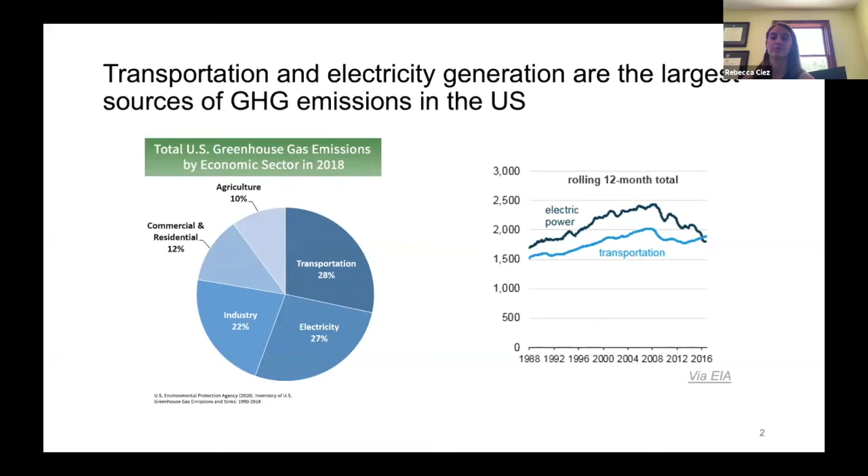I'm really happy to be here to present some of my recent research looking at batteries for decarbonizing and meeting climate challenges. When you think about energy and emissions, transportation and electricity generation are the largest sources of greenhouse gas emissions in the United States, and energy storage has potential roles to play in both. Transportation has recently overtaken electric power as the largest source of emissions in the US, and transitioning to zero emissions vehicles, whether battery electric vehicles or potentially fuel cells, is one way to mitigate that. But energy storage also has a role to play in electric power generation moving forward.

In the EV market, there's been a lot of development. There are many more vehicle models available today in the US than back in 2011, when there were fewer than 5. Today there are almost 50 different vehicles you can choose from. Globally, the market share of EVs is trending upwards, right now about 2.5%. There might be some shocks because of the coronavirus pandemic, but the long-term trend is still looking up. But what about the power space?

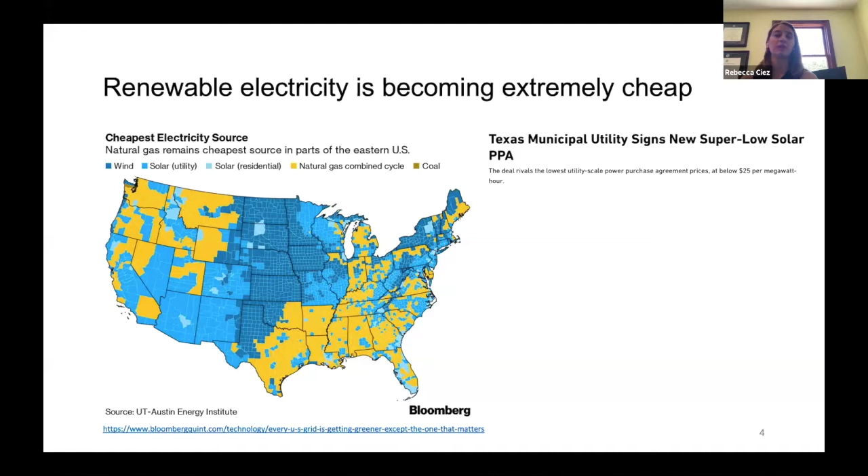Coal is being phased out more and more in the United States, and it's potentially being replaced by wind and solar, which is being bid at really low costs. Today, new power projects in Texas, Alberta, and Colorado are bidding to deliver renewable electricity at 2 to 3 cents per kilowatt hour.

And so these are pretty different places. It's not just that there's a lot of solar in California anymore. These are pretty diverse markets that are being able to deliver very inexpensive renewable electricity.

But obviously renewable electricity is not as consistent as a power plant that you can just turn on and off. And so we want to be able to store the electricity that's produced when wind and solar resources are available to meet demand at other times of the day when people want to be able to have electricity.

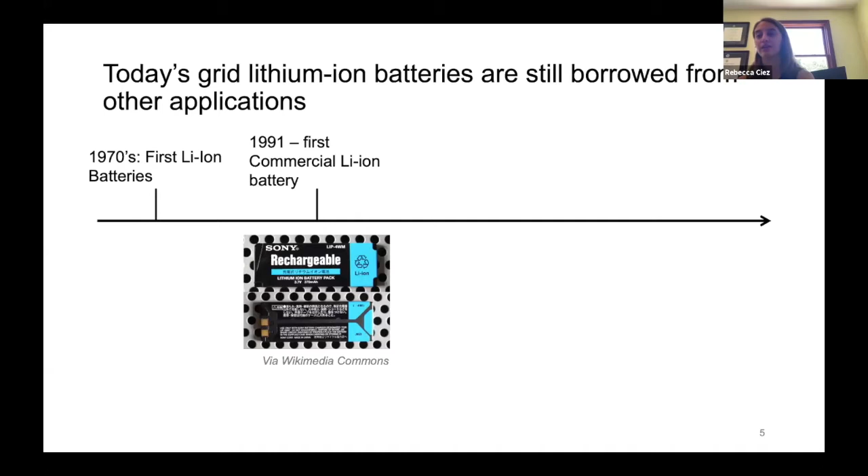And so when you think about the role that batteries can play in the grid, what we're using today is still largely borrowed from other applications. Lithium-ion battery research really started in the 1970s. They were commercialized for consumer electronics in 1991 by Sony. And so basically every new application has been largely borrowing from what's existed.

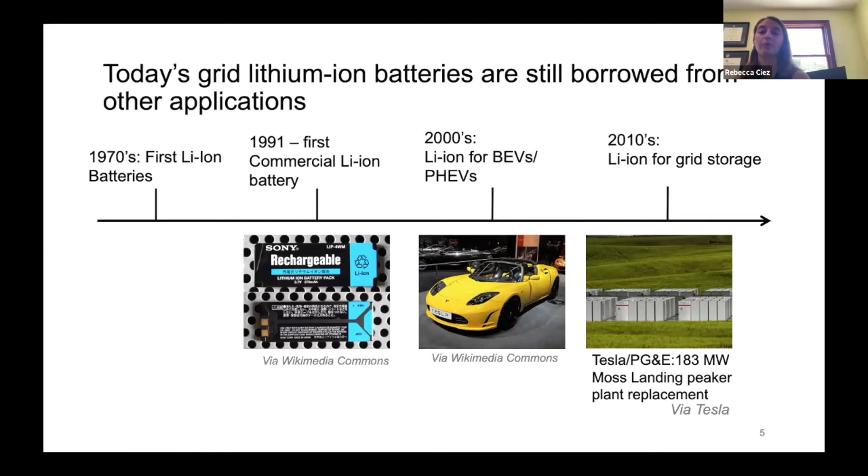So in the 2000s, they were taking the lithium-ion batteries from laptops and putting them into electric vehicles. And what we've seen recently is that you're essentially doing the same thing, taking the lithium-ion batteries from electric vehicles and putting them onto the grid. And so this is a project that's under construction in California, where they're replacing a natural gas power plant with Tesla batteries.

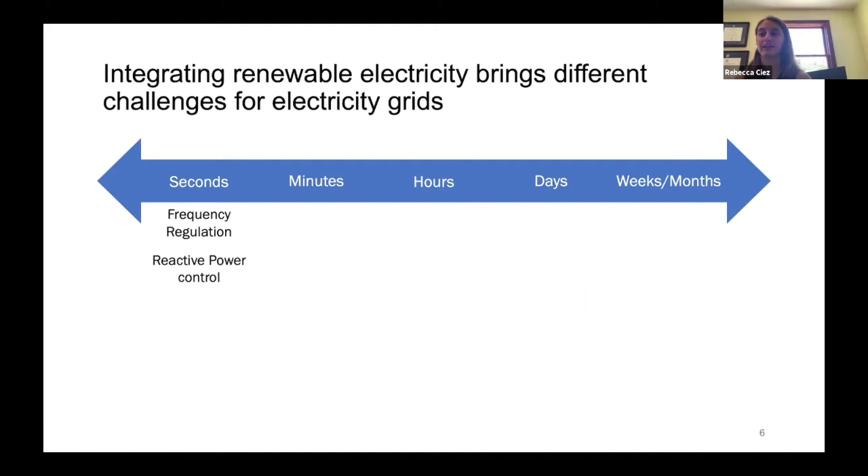And so when you think about what you want to be able to do for real renewable integration in the grid, you're thinking of different challenges on different timescales. On the order of seconds, you're thinking about how do you provide resources for frequency regulation or reactive power control, be able to do black start or synchronous reserves, and then finally starting to get into these peak shaving or peaker replacement.

What all of these applications have in common is that they're relatively high power. So you're not really providing energy for a long duration of time, but you need to be able to deliver electricity quickly. And so the batteries that we're pulling today from electric vehicles are already able to be competitive in this space, right? You need your car to be able to accelerate quickly, so there's already sufficient power density in those batteries to meet these demands. And the markets for these services have high enough prices that you can recover your investment on what is still a pretty high capital cost on lithium-ion batteries today.

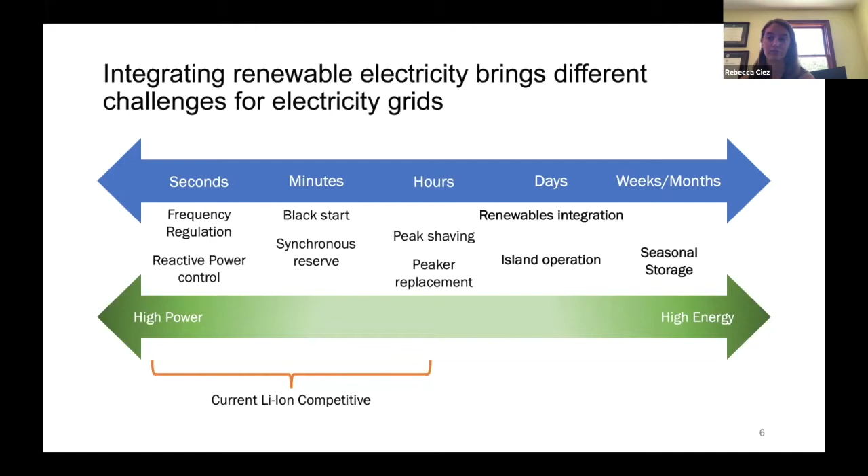But longer term, what we're really looking at is these renewable integrations. So how are you shifting hours of demand from when you have overgeneration in the afternoon to the evenings and the early mornings when people actually want to use electricity? Could you potentially do island operation of microgrids, and then potentially even look at some seasonal storage applications where you're really looking for high energy density batteries?

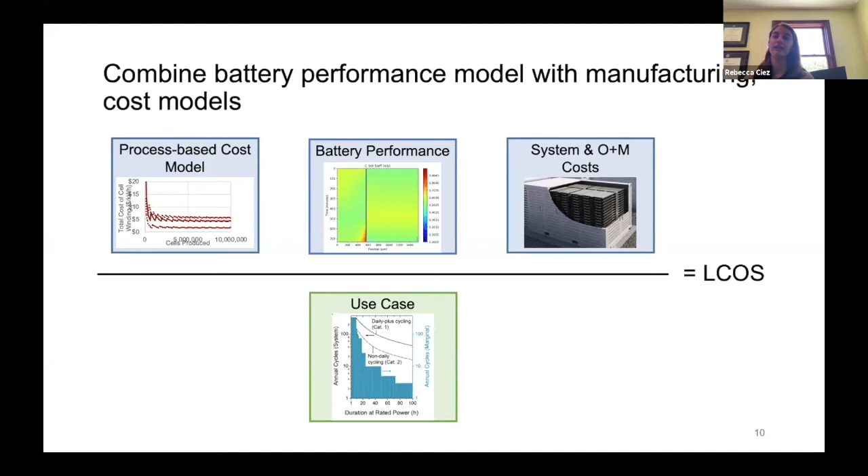And so to model each of these different components, we have different submodels that we combine. So the first is a process-based cost model to look at battery manufacturing costs depending on your design decisions. We do a simple model of battery performance to see how the batteries behave over these charge and discharge cycles. And we make some assumptions about the system hardware and integration costs. And then we used a use case. And so this is drawn from an ARPA-E call for proposals looking specifically at long duration storage. And I'll talk a bit more about what goes into that later.

And so I know that this is a diverse audience, so I'm going to talk a little bit about lithium-ion batteries. And so hopefully I will give you enough of an overview that you know what I'm talking about when I talk about the system components. So all lithium-ion batteries are named because lithium is the charge carrier, but the materials inside the battery can vary a little bit. So each battery has two electrodes, a positive and a negative electrode.

So the negative electrode or the anode is typically made of graphitic carbon. And that's common across almost all commercial lithium-ion batteries today. So things in your phone, your car, an EV, anything else, you're looking at a graphitic carbon anode.

Then you've got the positive terminal or cathode, which is made up of a bunch of different types of materials. And then finally, there's an electrolyte, which is typically an organic liquid that's used to shuttle the lithium ions between the two. And so the energy density of the battery really depends on the voltage difference between the two electrodes. The specific capacity, most of the differential is driven by what's happening at the cathode.

So cathode materials can vary widely. Some of them have really expensive transition metals. So there's a lot of discussion about how can you remove cobalt from certain formulations and increase the use of nickel or manganese that are less expensive. And so there's a lot of innovation to improve the specific capacity of cathode materials, and then eventually to remove the graphitic carbon and just have lithium metal anodes.

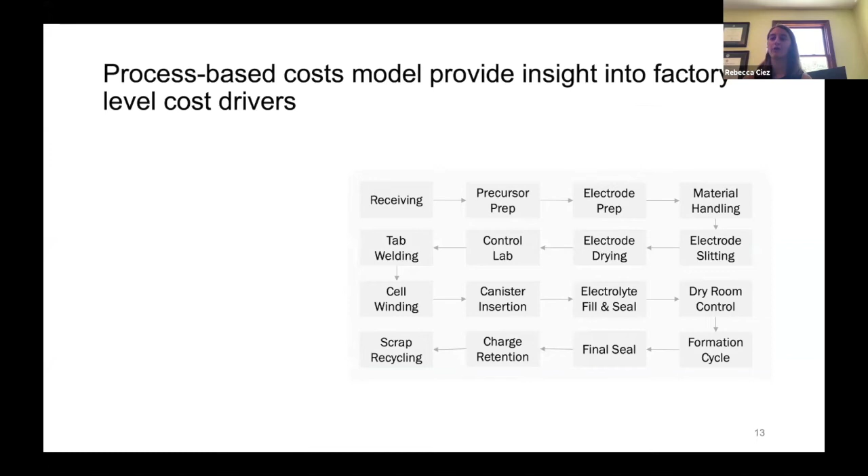And so based on those two different geometries, we built a process-based cost model to factor in what's happening at the factory level. And so to do that, you take every step in the battery manufacturing process, and you kind of figure out how many pieces of equipment you need, what kind of labor requirements there are, and you can build a model depending on how many batteries you're trying to produce.

And so, as you can imagine, you've got your first machine. As you increase the production volume, you see the cost per unit decrease up until a point, right? So you're using it to produce more parts, and so the higher utilization means each part costs less individually, but eventually you have to buy a second machine or you have to hire a second person. And so you see these spikes in the production cost that vary as you increase the production volume. But eventually you get to a point where it doesn't really matter that you've had to buy a second machine. You're still dividing by such a large number that you've reached an economy of scale. And so this is what I would consider economies of scale at a factory level.

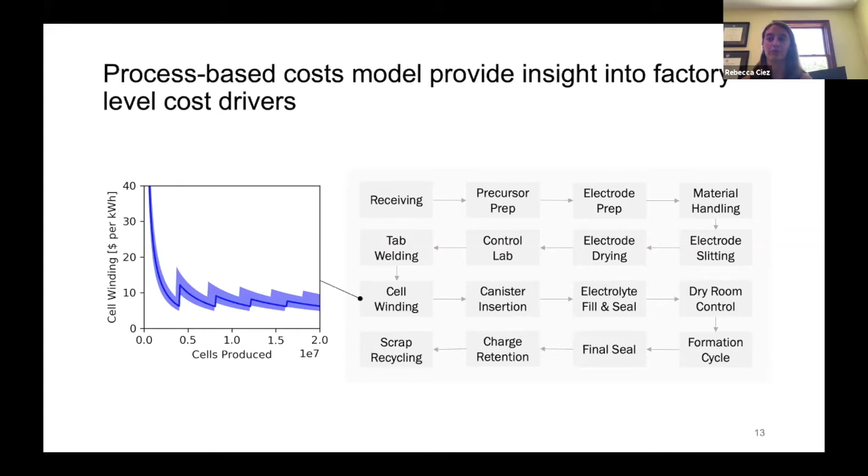And so this helps drive decision-making if you're trying to make choices about what kind of batteries to manufacture, and provides insights into where there's opportunity to further improve costs. And so when you build all of these up, you can get one overall manufacturing cost per kilowatt hour, depending on the production volume of batteries.

And so what we see is pretty consistent with what we've seen in previous studies looking at manufacturing EV batteries, that you're reaching these economies of scale at less than a gigawatt hour of annual production per year. Just for reference, I think Tesla's Gigafactory is currently producing about 30 gigawatt hours per year. They're looking to expand it up to 50.

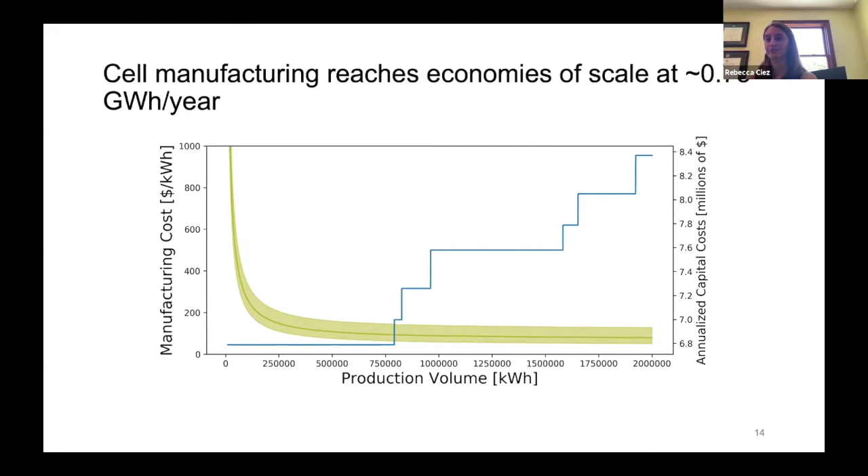There are dozens, if not hundreds, of these scale manufacturing facilities in China. Europe's investing heavily. So these are definitely typical scales of battery manufacturing capacity today. And so when we run this for each of the different types of cells that we were considering, we see that the pouch cell costs decrease as you increase the cathode thickness.

And so basically what you're seeing is you're spending less per kilowatt hour on other stuff as the active volume increases. And so we see that there's pretty steep drop-offs, especially if you go from like 100 up to 300 microns in terms of thickness. And then eventually you kind of reach this asymptotic value. And then the bobbin cell that we considered is somewhere in between.

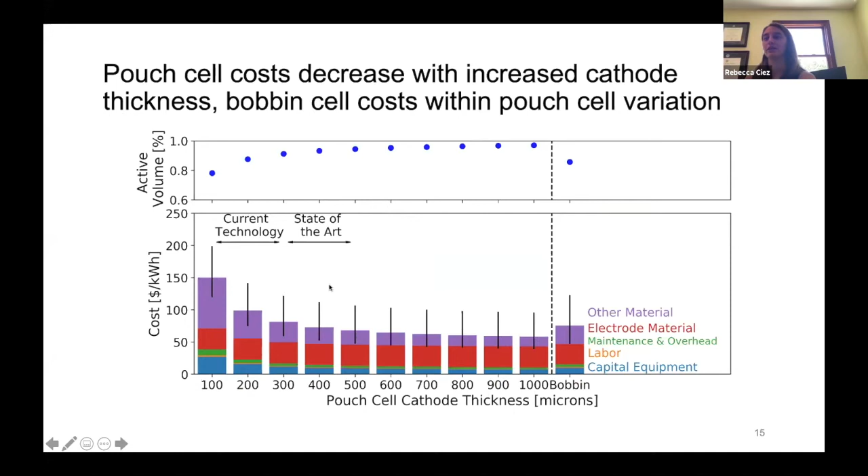And so once we had these cells constructed, we wanted to simulate the battery performance. And so I'm not going to get into too much detail. We used an existing model out of UC Berkeley that lets you input specific parameters about the cathode material, and you get a first order approximation of the charging and discharging efficiencies, right?

So basically the difference between the equilibrium voltage and the actual model voltage is what's driving a lot of this efficiency loss. And it varies depending on the type of battery you're producing. But overall, charging and discharging efficiencies are relatively high.

And so then what was really important was to factor in a relatively realistic storage profile. And so as I mentioned, we were using some assumptions based on the ARPA-E long duration storage call for applications. And so basically what they're assuming is that you're providing about 8 hours of storage on a near daily basis, right? So if you were to think back to the chart with electricity prices in California, you're arbitraging from mid-afternoon when there's a lot of curtailment to provide enough storage for both morning and evening peaks.

And then you've got these other longer duration storage events that happen with less and less frequency, right? So you can imagine that there might be a lot of days per year where there's cloud cover, and so you want to be able to provide 2 days worth of storage for those 2 peaks. And then as the duration of storage increases up to about 4 days, they're assuming that there are about 3 of those events per year.

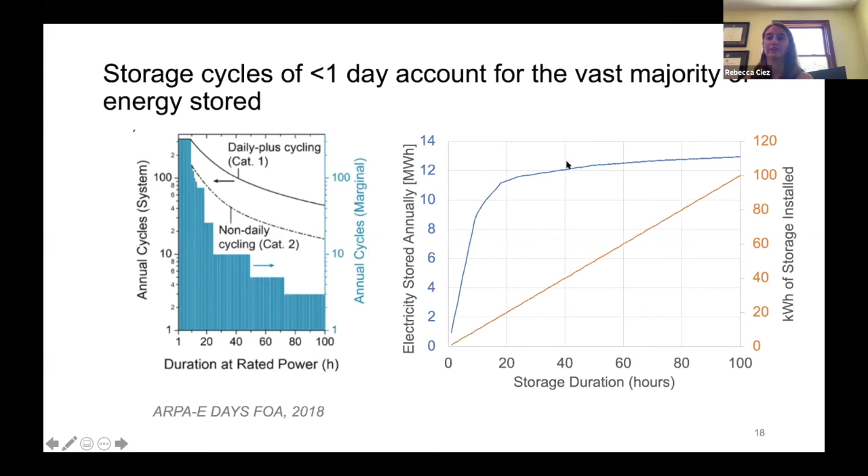And so that bears out: if you install additional storage capacity to meet that longer and longer duration, you see this linear increase in the kilowatt hours you have to install. But the annual electricity you actually deliver from that storage capacity drops off pretty quickly. So most of this is these very short cycles with relatively small additions from longer duration storage.

And so when we account for that, again, with the cost of manufacturing, we see that you can achieve relatively low levelized cost of storage, and it's lowest when you're cycling most frequently, which makes sense, right? So if you're utilizing the capital you've installed more frequently, you can really drive down the cost of storage.

And so we see that these costs of 5 cents or lower are generally pretty comparable for all of the different types of battery, the different configurations we looked at. So these pouch cells with different electrode thicknesses, and then the bobbin cell.

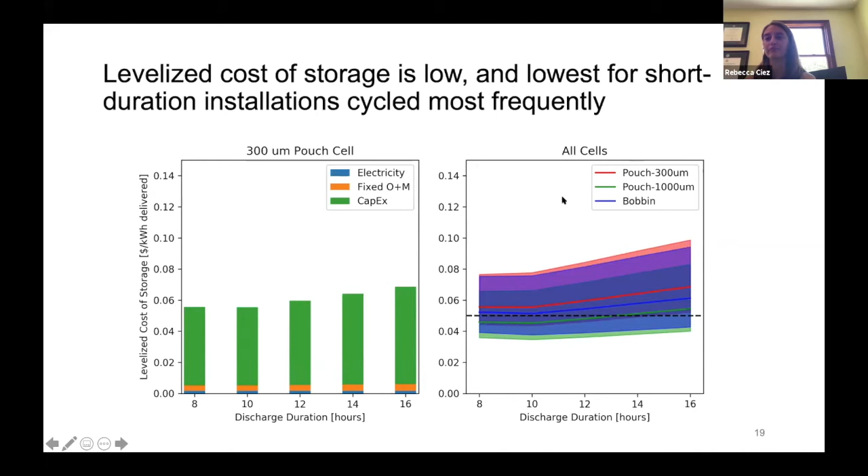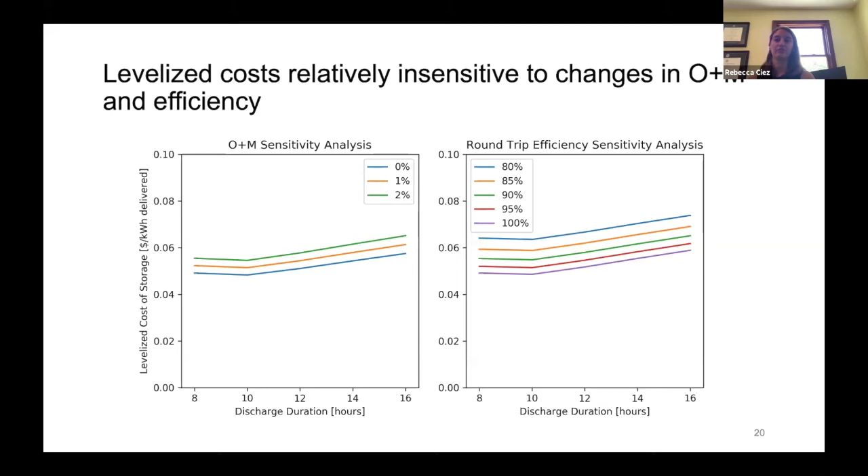And so we also ran some different sensitivity analysis, and we see that the levelized cost is relatively unchanged by changes to the operation and maintenance cost as a percentage of the installed capital cost. And then round trip efficiency also has a relatively minor impact on the cost of storage.

And so lithium-ion batteries designed specifically for long duration storage can cost less than today's batteries. Reducing the balance of cell material relative to electrodes can reduce cell costs. There are existing low-cost cathode materials to help reduce the upfront capital costs. That does hurt on the back end.

So some of my other research has looked at battery recycling. And if you want to recycle batteries, a lot of people are looking for high value materials to be present. And if that's not the case, it's less economical to do battery recycling. If you're looking at 4-hour applications, cell charging and discharging efficiency isn't terribly sensitive for these longer load shifting applications. And then you really want to have low O&M costs, which is helpful if you've got a closed form cell.

And so I sort of mentioned seasonal storage, which definitely was not covered as part of this research. And so what are we talking about when we talk about seasonal storage? So basically there are these known patterns of reduced electricity output. If you've got wind, plant capacity factors generally drop off in the summer, so they're called the summer doldrums. And then obviously during the winter, there's just less sun in the northern hemisphere. The opposite is true depending on where you're at geographically. But these are really predictable changes in electricity output.

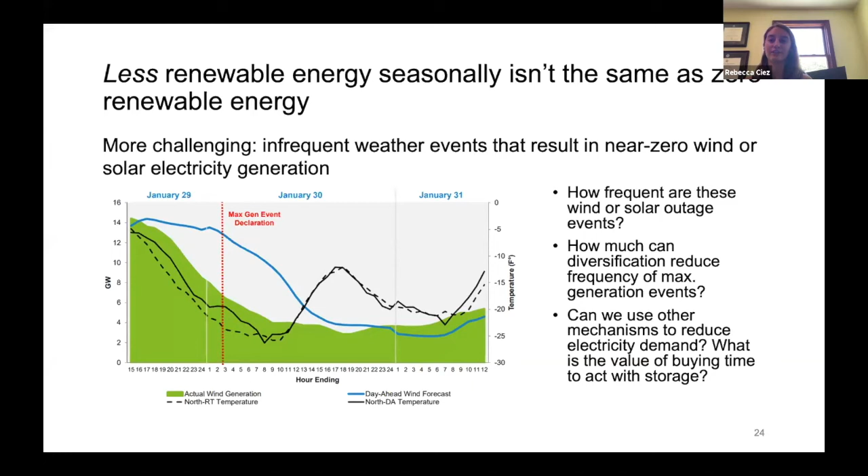And so how frequent are these rare events? And can we diversify the electricity mix enough that we wouldn't have to worry about these events happening from a single source? And then are there other mechanisms to reduce electricity demand? And is there a value of using storage to essentially buy yourself time, right? So if you have a 3-day battery and you're using the 3rd day's worth of storage, you were preceded by using 2 days worth of storage and kind of knowing that things weren't going great. And so are there other potential mechanisms that we could employ for these different infrequent events in a way that we haven't previously?

And so just looking forward for the role for low carbon energy systems, today's grid storage projects have very, very short procurement times, right? So their projects are bid, installed, and then up and running within like 18 months in some cases. So it's an incredibly fast timeline compared to a lot of power plants. We see that lithium-ion batteries can provide lower cost storage, and there's still room for improvement. And so looking at that as a potential new entrant technology, that's really tough to beat these existing markets, especially if you've got these really short project times, right? So it's hard to enter that if it's your first big project.

And then storage systems, or really anything that you would want to use infrequently, would have to be exceptionally cheap. And so if you wanted to do longer duration or truly seasonal storage, we would have to be at a very, very low capital cost, essentially zero. And so finding those solutions will be extremely difficult.

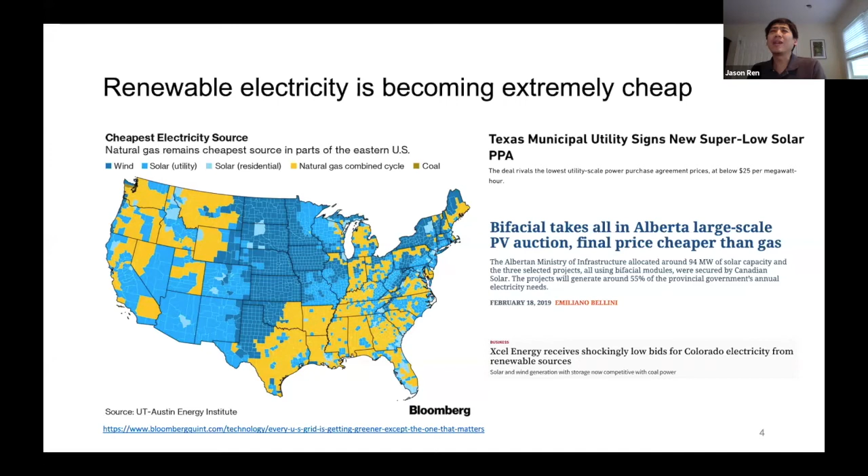The next question is on slide 7. Basically, Joe is asking why the floor of 22,000 megawatts is so high, and the high point is only about 1/3 higher. Is it the duck curve? Basically, how would you see the difference?

So this is the duck curve, right. It's the state of California, so it's a pretty big state. There's a lot of people, so they're using a lot of electricity even at night, and so there's just a lot of variability on a daily basis, even if the baseline is pretty high.

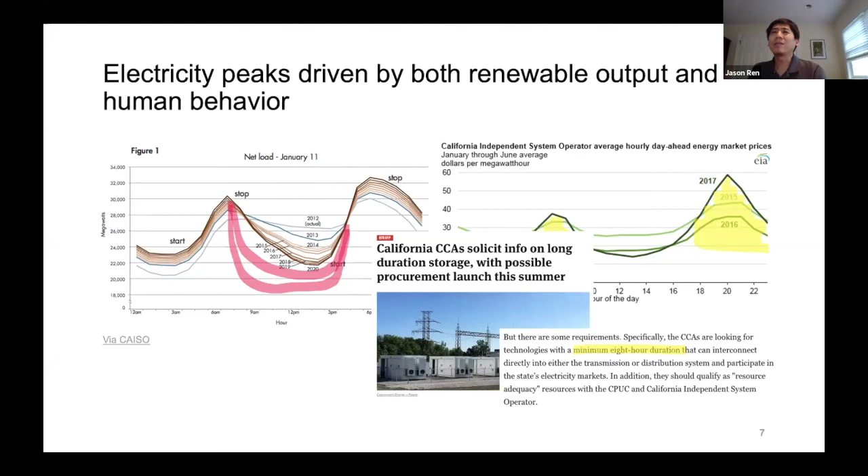So the next question is about slide 17: what are the factors affecting the efficiency curves? If you can explain that a little bit. So basically what's happening at the bobbin cell is you've got a decent amount of overpotential. You have such thick electrodes that there's like a traffic jam for all of the ions to make it all the way through. And when you see that concentration difference, that's what's driving down some of the efficiency.

You don't have the same challenge in a pouch cell with these thinner electrodes, on these really, really long charging and discharging times compared to what you would test in a car battery or a cell phone battery. And so that's why you're seeing these differences in efficiency.

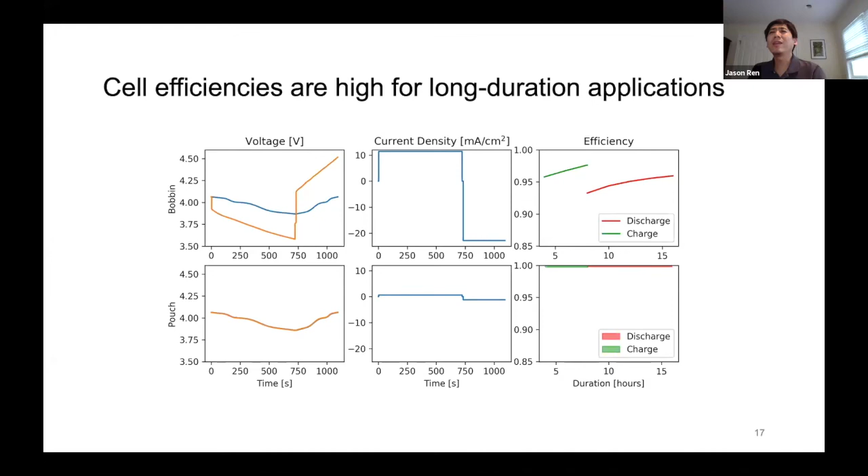Yeah. So I cut off some of these for spatial reasons, so hopefully everybody can see on their screen. But yeah, EIA makes these graphs for different places.

Okay, so next one is about cost. Regarding, say, return on investment, where do you see the revenue generation in terms of implementing the different battery technologies in this case?

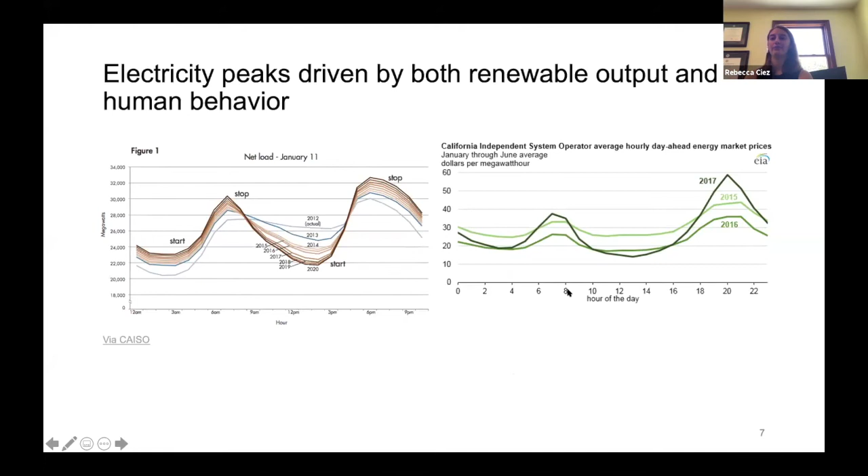Yeah, so really what you'd be looking for is to be able to sell electricity at these higher price times. And so if you're getting electricity at 2 cents per kilowatt hour, or potentially even zero. So what we've seen a lot recently is existing solar PV plants are installing batteries in California to be able to make up for this price differential. So they're getting the electricity at zero because they can't sell it into the market. And then you're making up that difference in these evening and morning periods when prices are closer to 4 or 5 cents per kilowatt hour.

Yeah, for sure. Well, I'm just reading the questions as we go, but the next few questions are actually quite related. If you can comment on some other technologies compared to lithium ion, which you focus on, like sodium ion, or I think I've heard potassium ion, or even hydrogen storage, or even pressure conversion to energy. I mean, all these things. What are your thoughts on this?

Yeah, so there's a lot of interest in different, like potassium or sodium ions. There's challenges with cycling those. Basically, lithium ions are popular and prolific because the lithium ion is the tiniest charge carrier of these different salts. And so there are different challenges associated with those other batteries, and so they haven't been scaled up to the same degree.

Hydrogen's interesting because you potentially produce it at relatively low cost. Basically, you've got big storage tanks of hydrogen. You've got an electrolyzer or a fuel cell that's using it or producing it. And so you've really fully decoupled power and energy costs in those kinds of systems. It's just a matter of whether the market's really demanding electricity produced from those systems, or if you're too far out ahead. And then can you store it in a way that's cheap enough? Can you compress the hydrogen in a way that's cheap enough? And do that at the scale necessary.

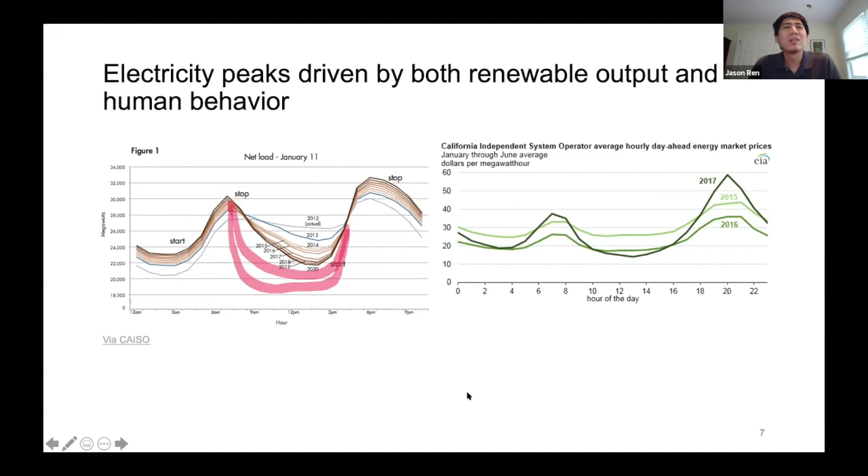Yeah, so I think looking at these longer duration applications is interesting. I do think that there's value to knowing that things in your system are not operating the way that you would want them to. And I think that's a potential area for trying to figure out where the true limit of this long duration storage should be. And so collaborating on trying to figure out where that floor is, and where you can provide value to do other demand response options by knowing that you've used several days' worth of storage. I think identifying that is important.

And then again, just being able to design systems where you could potentially foster these newer technologies to compete with lithium-ion batteries I think would be really important moving forward. So if we need all these different storage assets, we should be thinking of ways to create markets for them to be tested and deployed. Absolutely, I can't agree more.